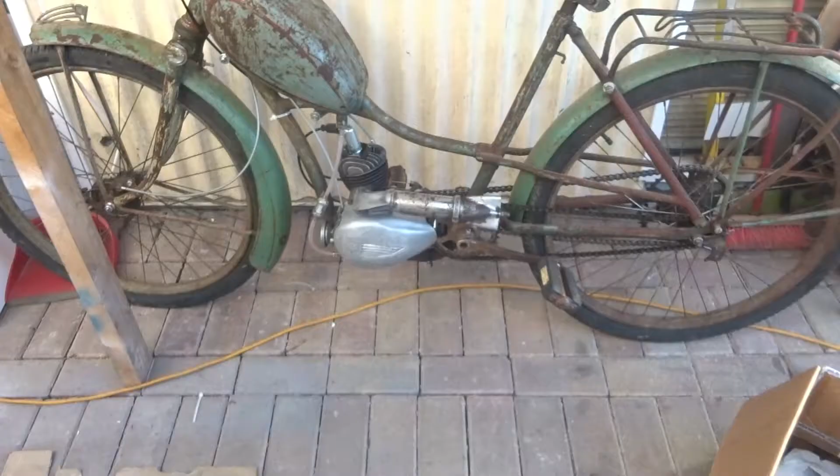In this video I'm going to be taking apart a Victoria Vicky FM38 engine, or it can also be an FM38L engine. In most of the Victoria Vicky 2s that I've seen, there's actually a petrol tank that sits on the carrier here, and the engine is attached down here.

But in this case, this came off of a bike where it was actually sitting on the back of the bike, but the engine that was on it was very rusted, and this one is replacing the engine. So what I'm going to be doing is, I have a second engine here. I don't have the aluminium cover for it, but I'm going to be taking the engine apart. So this video is taking apart, and putting back together probably on a separate video, a Victoria Vicky FM38 or 38L engine.

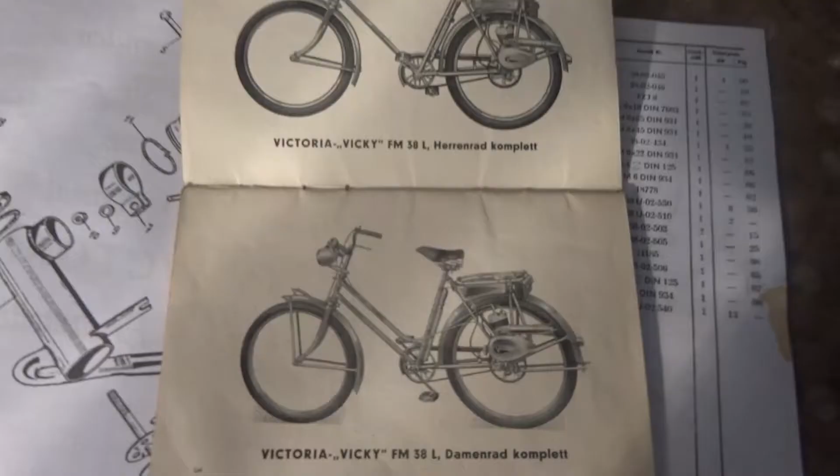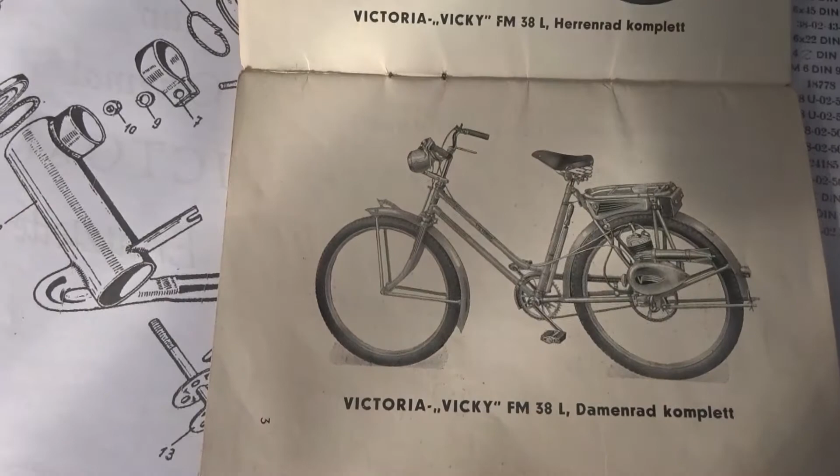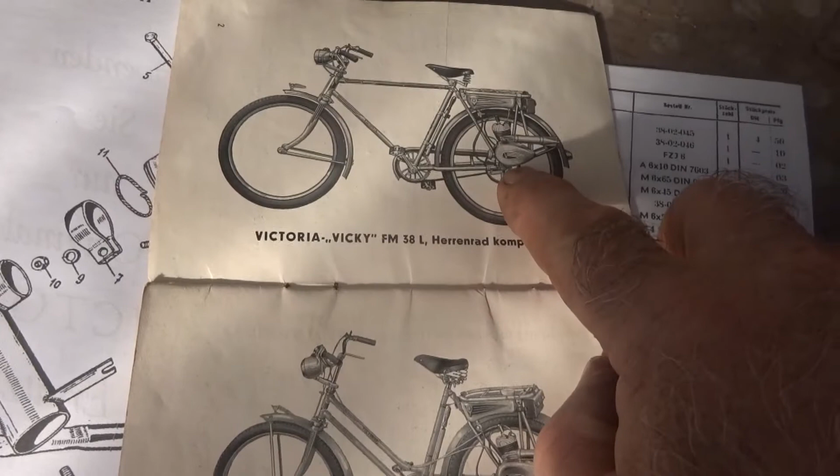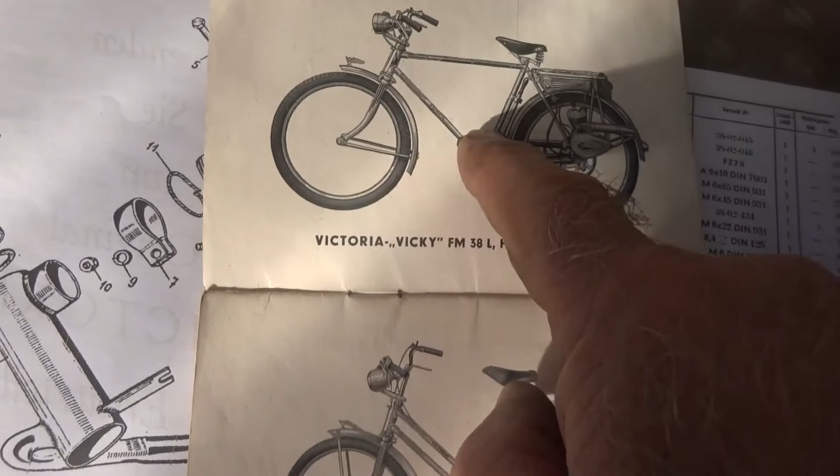These are pictures of the Victoria FM38L. This is the men's model, and this is the ladies' model. They're exactly the same, except obviously for the bar here. So as I said, the engine was normally fitted on the back of the bikes. As far as I know, these are called the Victoria Vicky 1, and then when the 2 model came out, the engine was put here. So that's the bike that I have there, the Victoria Vicky 2.

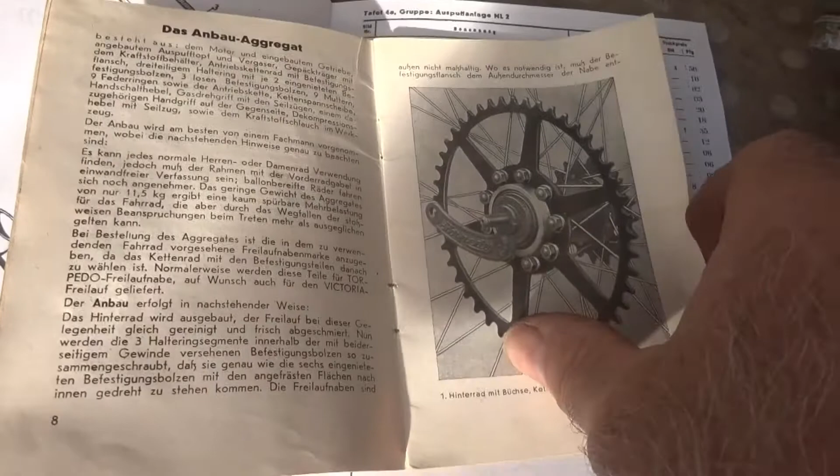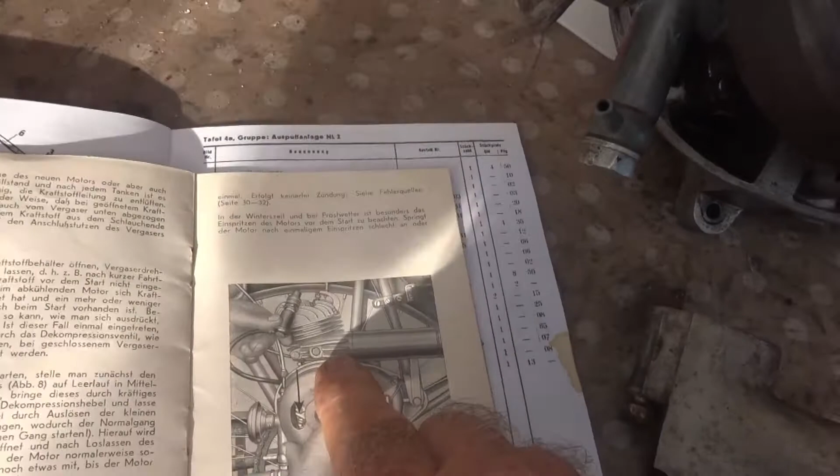So these are instructions, they're in German. I haven't been able to get one in English yet. So I'm going to go through it anyway. As you can see, this is the exhaust pipe here, and this is it here. That's the complete unit. And it's made up of a kind of a head unit, this basic pipe here, and this is the end piece here.

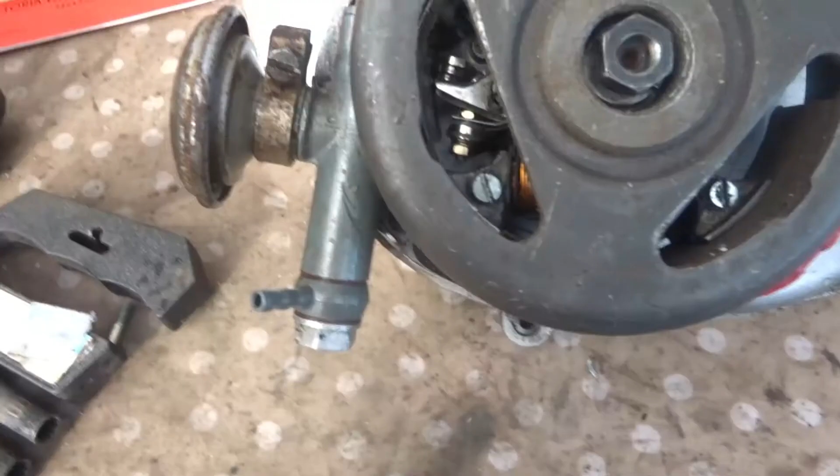There's a bar that goes through. This is the baffle. That bar goes through, and it's held in place by this bolt here. So I'll take that bolt out there now first, so that I can take this out.

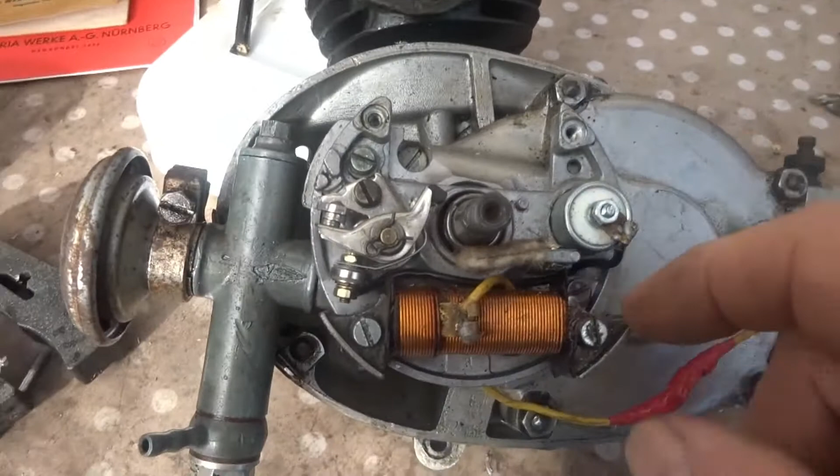I'm taking off the rotor cover there now off the dynamo, and it's a 14mm socket. To get it off, it's clockwise. The threading is clockwise to get it off, and anti-clockwise to put it on, obviously because of the rotation of the rotor, which goes that way. Right, so I'll just pull that off there now. It's not like a Quickly where you have to use pullers.

Now, I don't think that this is actually the correct rotor cover that should be on it. On another one, there was a slightly narrower one with a slope here. It was roughly the same length out to here, but it was sloped off here much more. I've actually put it on the other bike, and it spins around inside the cover better. So this may not be the correct rotor cover for this, so I'll just pull it off there anyway. There's a spring washer inside there as well. It's not coming off that easy. So that's it.

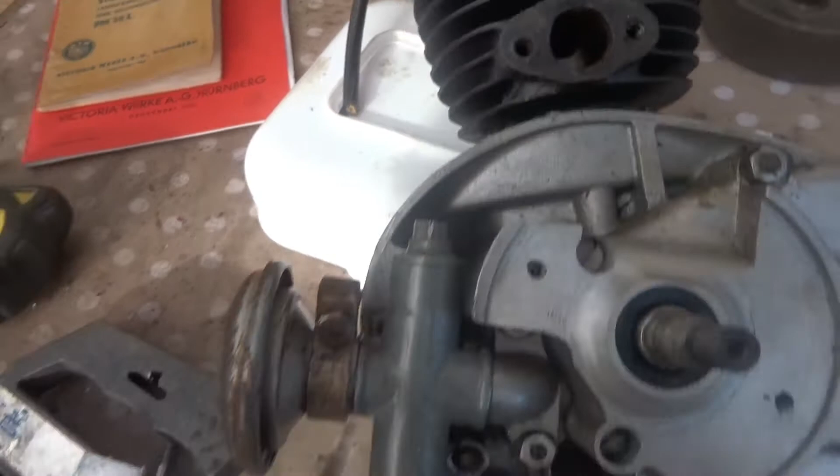Now this is the electrical unit. Somebody has obviously taken the coil off of it, the condenser, the lighting coil, and the points. So that comes off by undoing that screw there and that screw there, and this should be attached there, for this generates the electricity to the lights, if there are lights on the bike. Now on the one I have, there's actually no lights on it, headlight or taillight, but the wire for lighting the headlight and the taillight is connected here and goes through the frame.

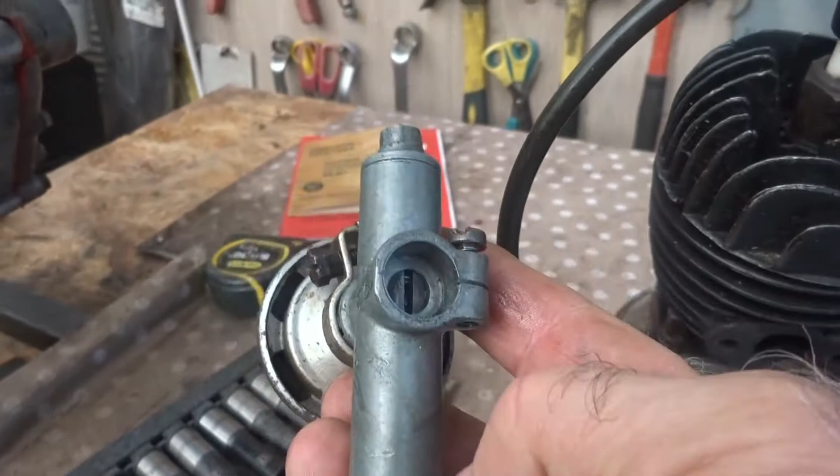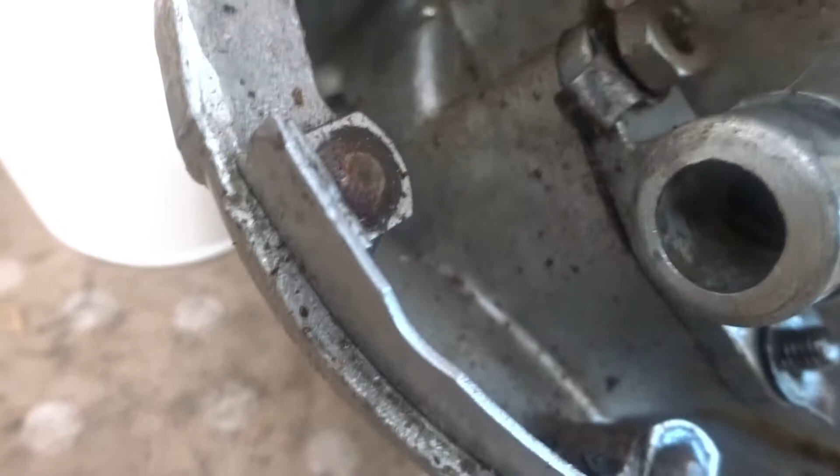So I'm going to take that off now next. That's the dynamo unit coming off there now. There are the two screws that are holding it in place. That's the other one there. Right, so the important thing with this now is that there's actually a little spring here which has to go back on, so that's not to be lost. Right, so just looking at it now, I'll take the carburetor off next, and then I'll take the head off.

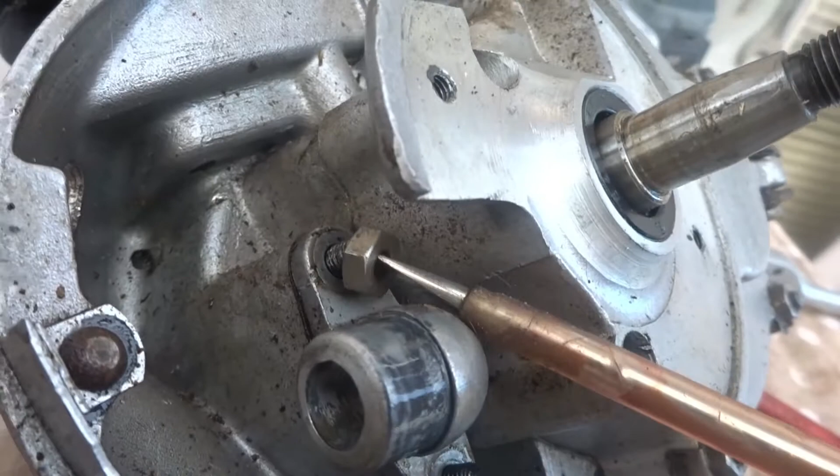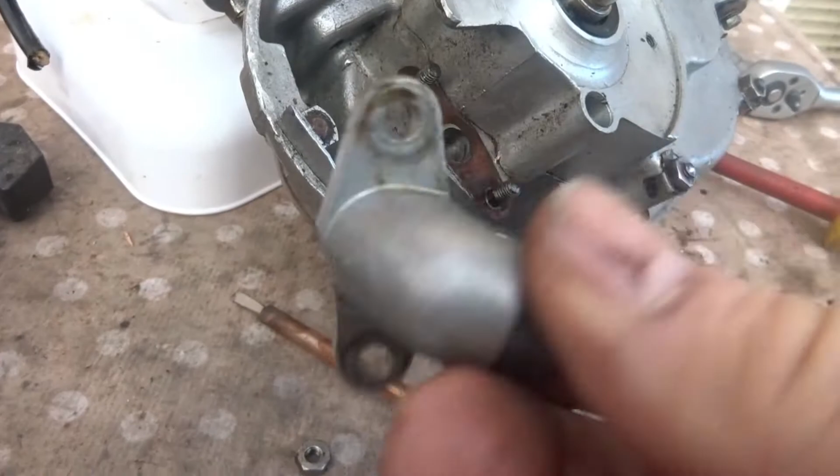So to get the carburetor off, I must undo this screw down here, which holds it onto this little unit here, which is part of the engine. And it's actually not part of the engine, it's a separate unit itself that has two little bolts on it. So I'll probably take that off next. So that's the carburetor off anyway.

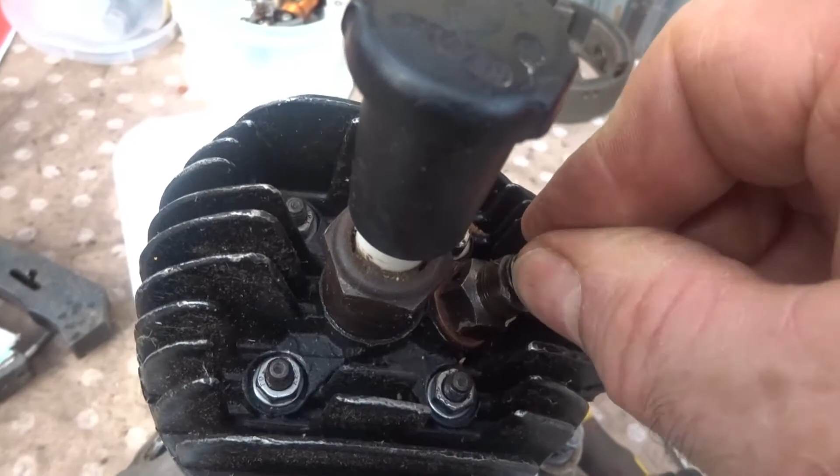And I think I saw a symbol on it somewhere, yeah, a Victoria symbol, which shows that it is actually an original one. I think it's called a Gurtner carburetor. I'll take that apart later on.

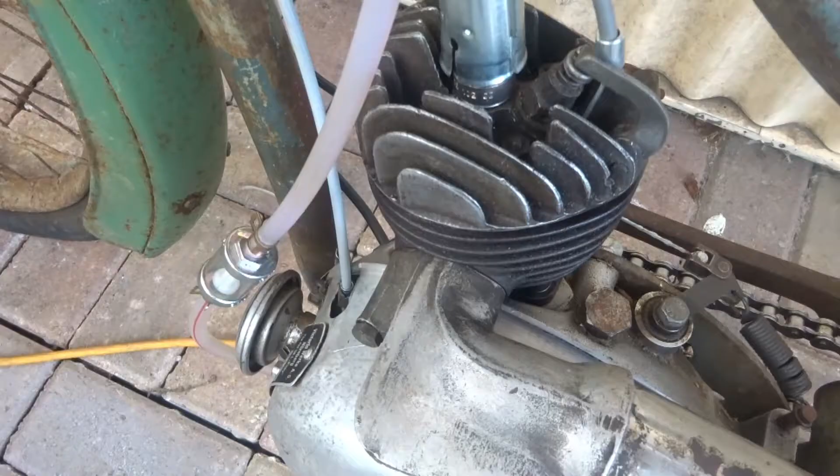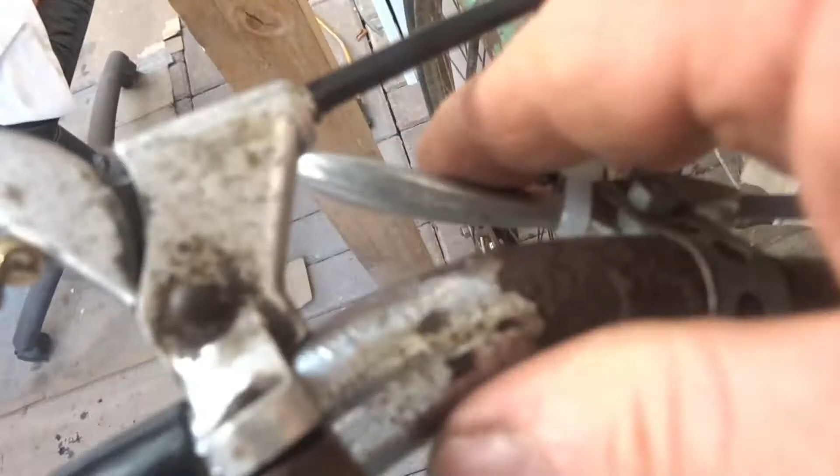Now these are actually 9mm nuts, so you'll need a 9mm spanner to get them off. And there are special little lock, kind of a lock washer on them. This one, the lug is broken off of it. So there's a little gasket on it there as well. So that's it. I'll take the head off next.

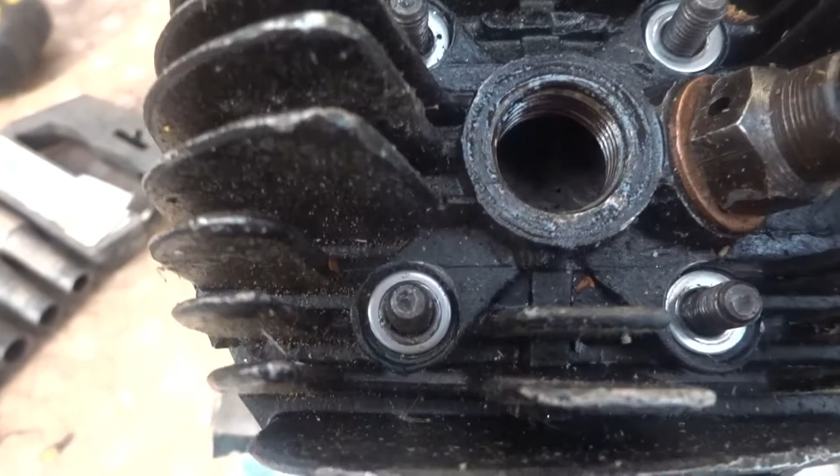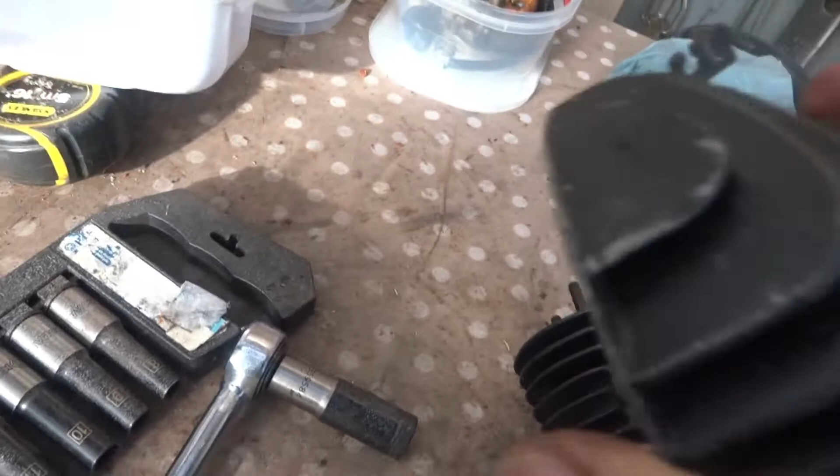So there are four. They turn out to be actually 8mm, so I've put on an 8mm to get them off. This is actually the decompressor to stop the bike. You can see you can press it down, there's a spring on it, and it pushes down a little valve kind of a unit, and it turns the engine off. That's the only way to turn it off, other than turning the petrol off. Right, so I'll continue to take the four of them off and see what it's like.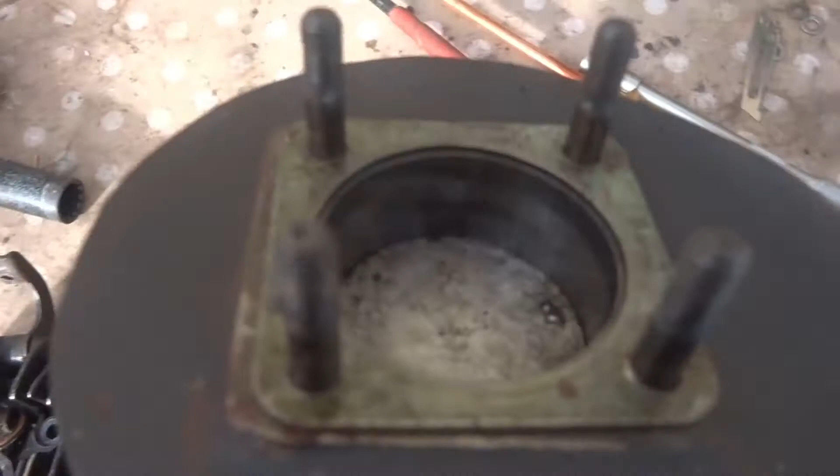This is the lever for pressing the bike off. So you have a decompressor cable going up to the handlebars. On the bike that I've completed there, you can see the decompressor cable. It's coming down, it's attached down below inside there. The little nipple on the end of it is hooked in there, and it comes up here onto a decompressor cable. So when you pull this lever here, it pushes down on that, and it stops the engine.

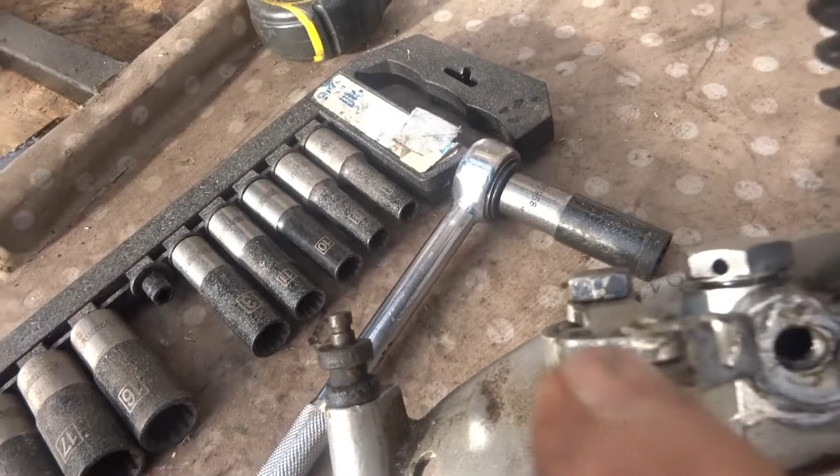Now that's the four bolts off, and it looks like there are four washers. They're not spring washers, just ordinary washers down there. So I'll turn the engine upside down now to get them to fall out. I'm just taking out this gasket here off the carburetor just to try and salvage it. It appears to be in reasonably good condition, but I have sets of them ordered anyway. So I'm putting all the various pieces into separate boxes.

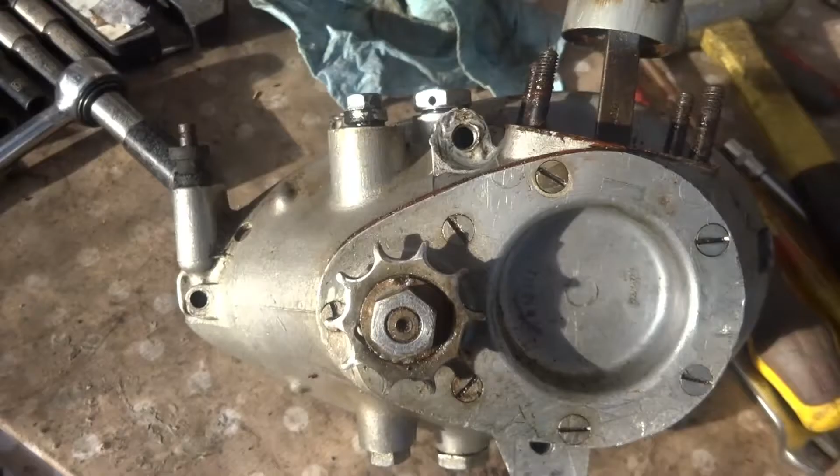So this is the head after coming off, and you'd see when I press this here, this little lever goes in and out there to turn the engine off, to let out the pressure. Right, the next thing to do is to take off the top head, and to do that there are four special kind of bolts there that must be undone, and you have to pull the head up as it goes. Now luckily enough the piston goes up and down. I must take off this gasket here. Actually I'll leave the gasket there, I won't take it off.

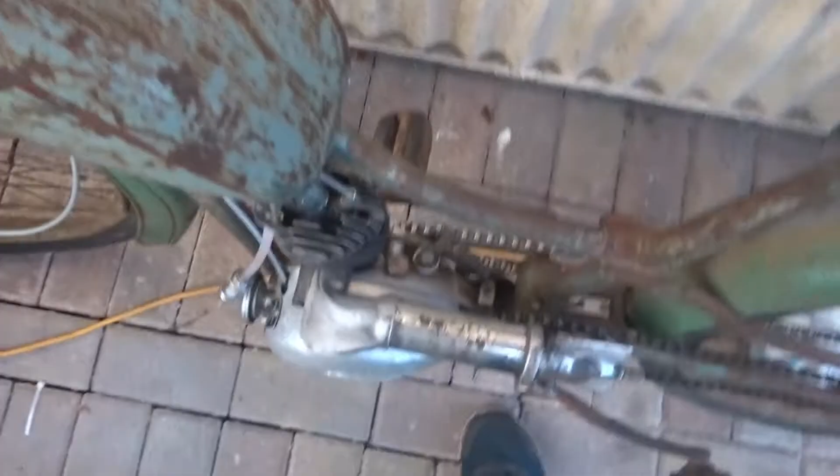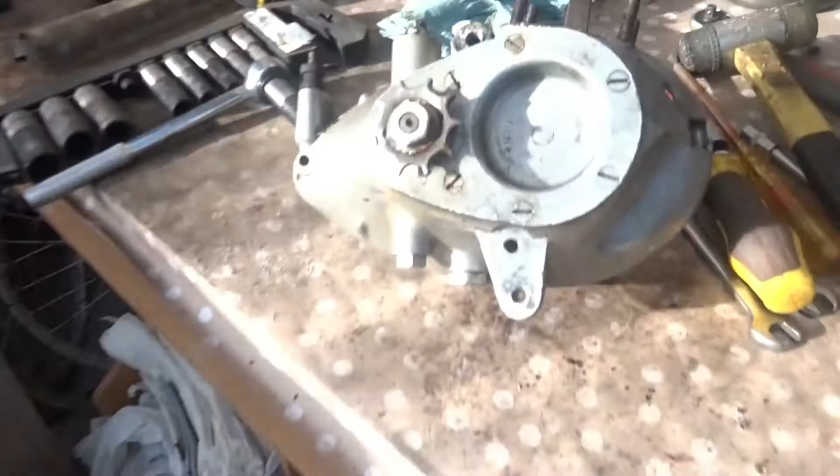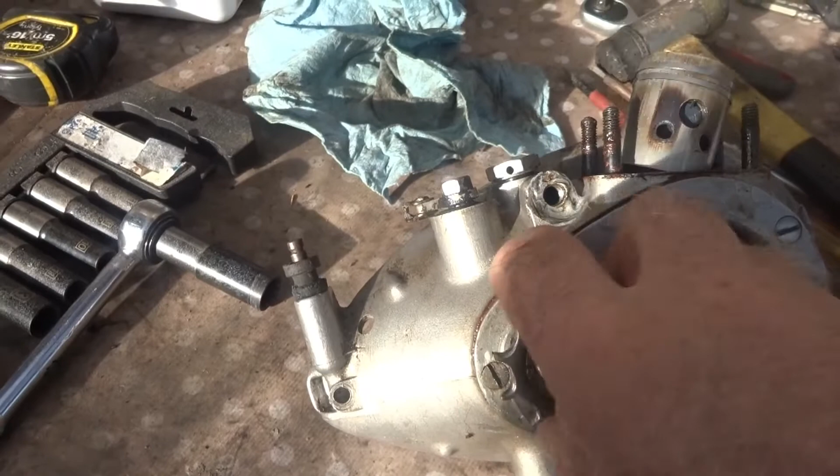Now I'm working away here undoing these nuts. They're actually 10mm, so you need a 10mm spanner for them. So I'll just keep working on the 4 of them. There, the other 2 there. I've just noticed on the upper head that there's a kind of a unit goes on there. I'll show it you on the other bike there now. That actually works the gears. As far as I know, this is the gears. I'm not an expert on these things, but it's a shame that that little piece is broken off there, because the barrel itself is absolutely perfect inside it.

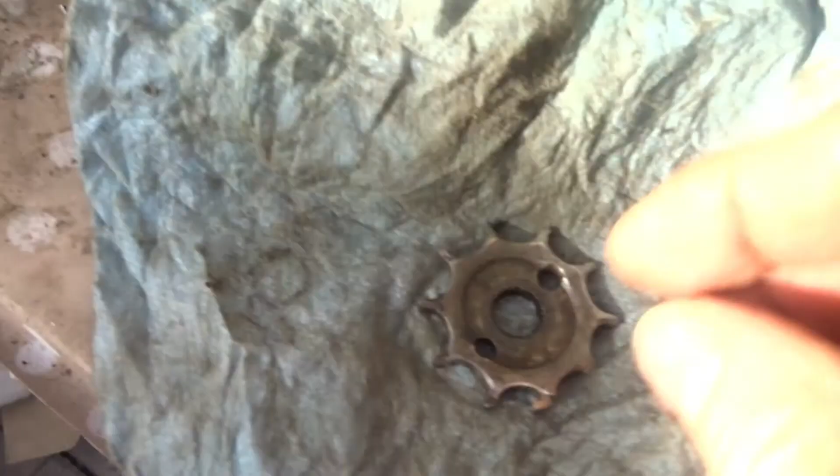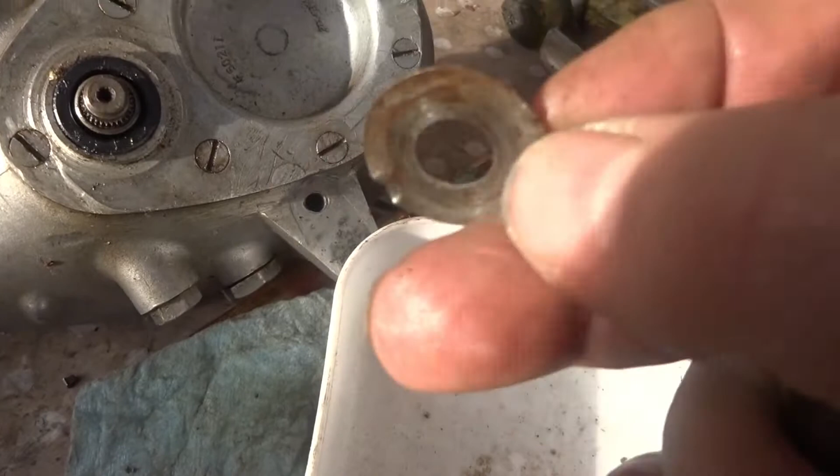I'm now taking off the sprocket so that I can get in here. One of my main reasons for taking this engine apart is to find out how the gear operates in here, because on this one I can't actually get it to go into, no, I don't have the correct 3-stage gear lever, so I'm waiting on something like that to arrive, and it pulls the gear shifting down there, that unit there with the spring on it, and it's supposed to give you a first gear, neutral, and second gear. So I'm hoping that I'll be able to see all that inside there.

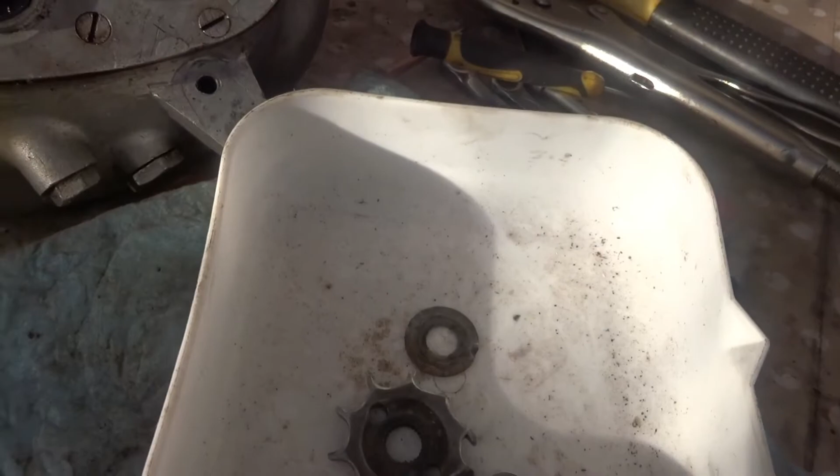Now I have to take the piston off. I wasn't going to, but to be able to stop the sprocket from moving around.

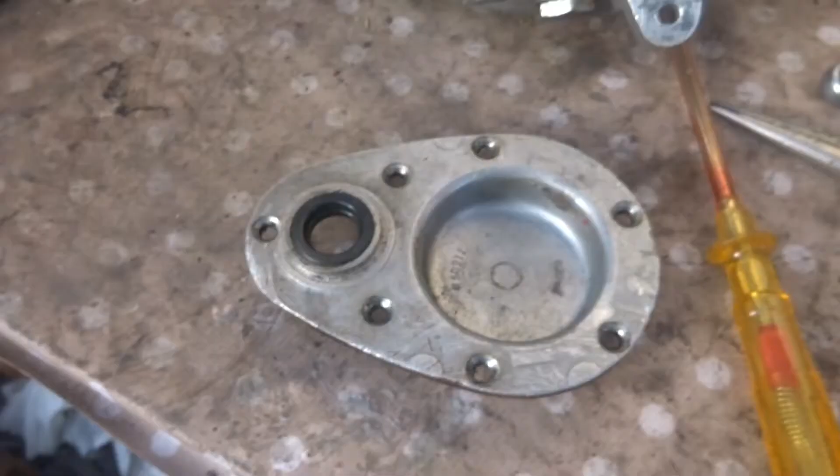Like so. I'll be able to put a screwdriver through the top of the conrod so that I can undo this nut here, which is probably 19. No, it's only a 17mm.

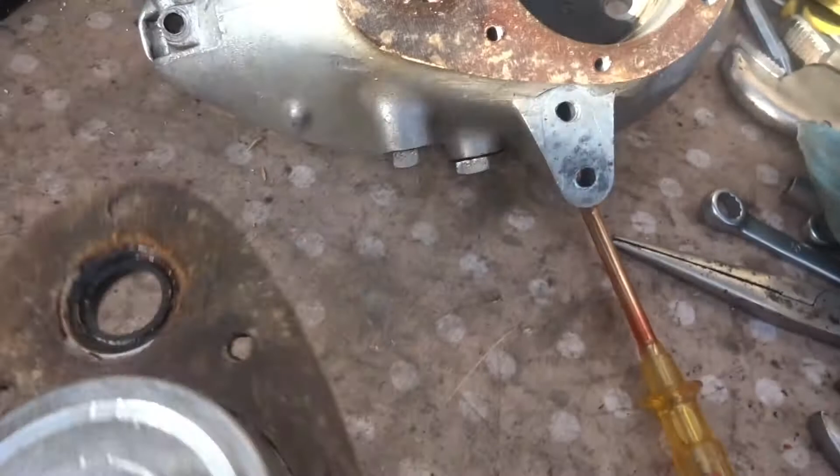Now the sprocket is pretty badly bent, and I've damaged it trying to hold it because the engine seems to be in neutral, and even though I held down the piston it was still turning. But anyway, I'll have to get a new one, and you can see that it sits on a kind of a spline. It goes down into that spline there like that.

When I took it off as well, that's the nut, and there was a washer underneath it. Now it looks maybe as if there was pieces on the end of it here. I don't have the spare parts list, but I'll see if I can source one of those sprockets. Right, the next thing to do now is to take this cover off here and see what's going on inside there.

That's the cover off there now, and there's actually a 15x24x7 oil seal on it. Now I'm not sure if the gasket has come apart in 2 pieces or if there's 2 gaskets. It looks like there's a gasket on there, and it looks as if there's a gasket on here, but I'd imagine there should only be 1 gasket there, but look, I'm not sure.

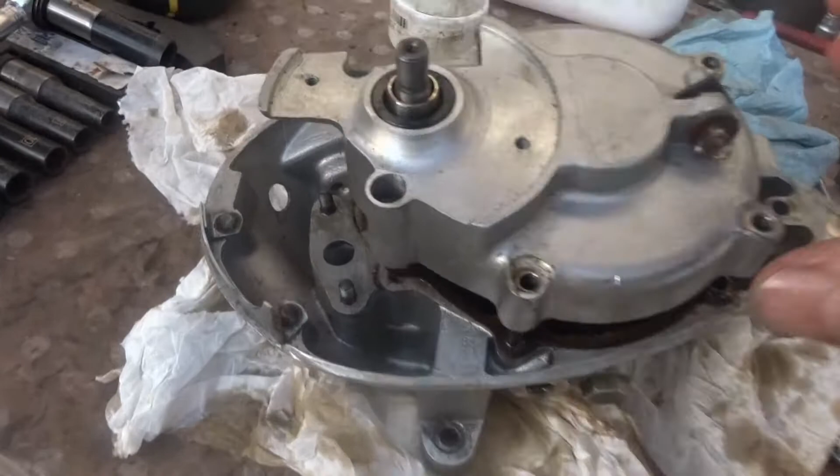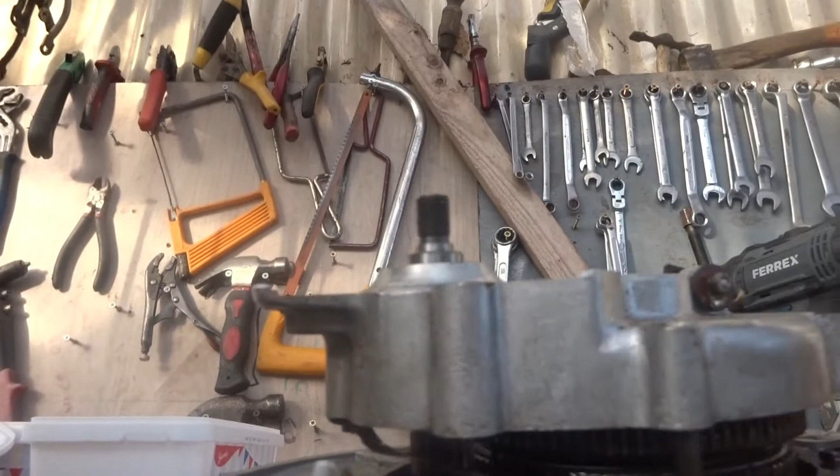So anyway, it shows the conrod mechanism here, which is very unusual. And I still can't see the gear mechanism, which is here. It appears to be in neutral, as I said, at the moment. So I'll have to take the casings apart just to see what's going on. Right, to get this conrod out, it looks as if I've got to take off a circlip here.

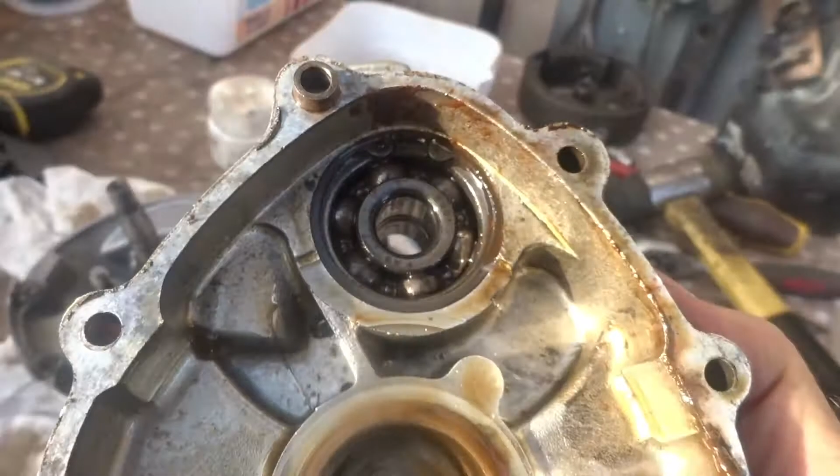Now I've turned the engine around and I'm going to take off this casing here. There's 4 bolts and it looks like 2 screws holding it. Right, I'm taking the oil out of it now, because it's spilt all over the table there, so I'm just undoing this nut underneath, which is a 17mm bolt. Sorry, it's a 19mm. So I'm going to turn it upside down and put it into this here.

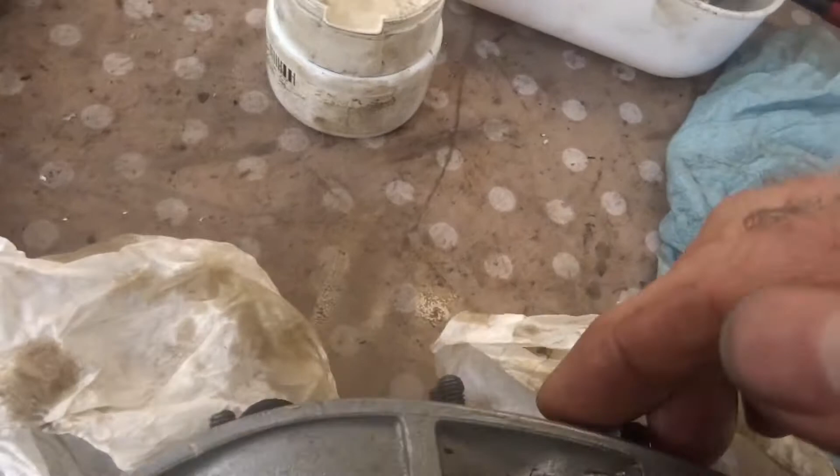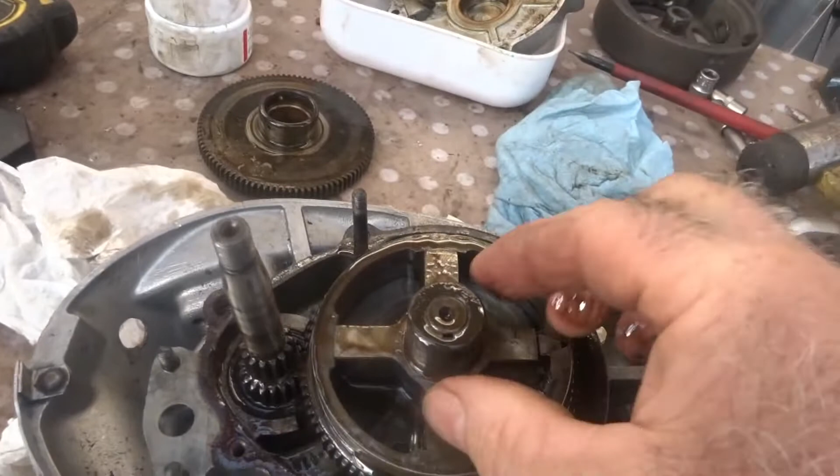Now the nuts came off, 3 of them, but this one here, the whole bolt has threaded out. So I'll just put it into the box, and I must take out these 2 screws. I think it'll come apart then at that stage. Right, it's starting to come apart there now, and I want to be careful because sometimes when you do these things, little pieces fall out and you don't know where they've fallen from.

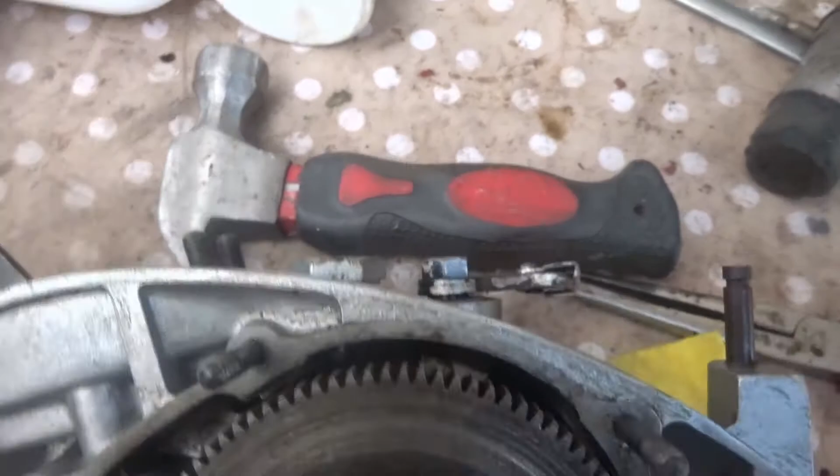That's the gasket. Okay. Right, up it comes. So there's a bearing in there. I'll have to check that out and probably change it. And here we have the gear system. So I'll have to take out these wheels and see what's going on. The one just comes completely out, like so.

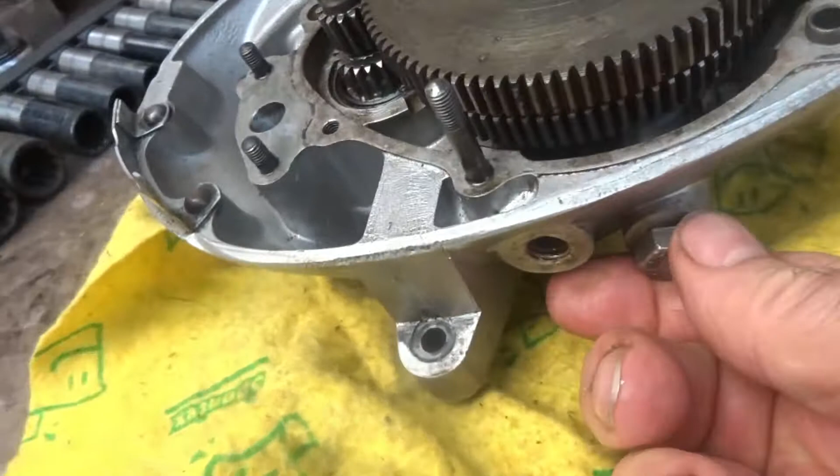I'll fiddle around with that now before I film it, just in case I start to lose bits and pieces. Right, this seems to be a locking collar here that actually comes off, like so. And I'll keep it the way that it comes off now, so that's up. There's a little pin here. Oops, there's a ball bearing fallen out of there now. So I'll just put it into my tray and pick up that ball bearing first now before I carry on.

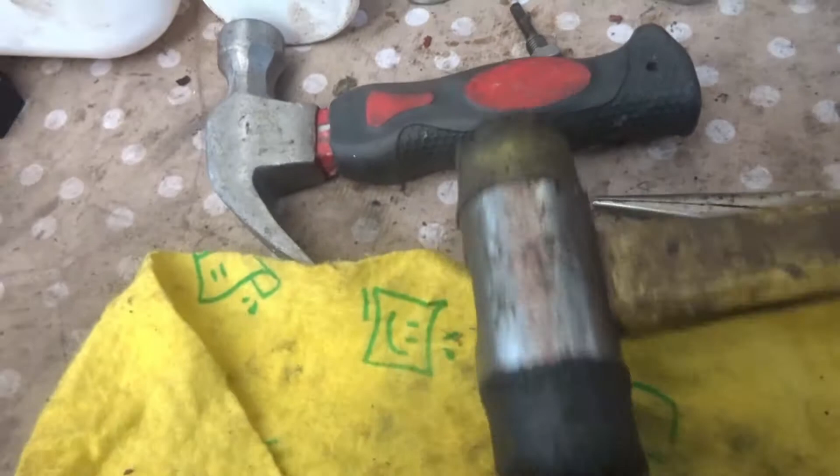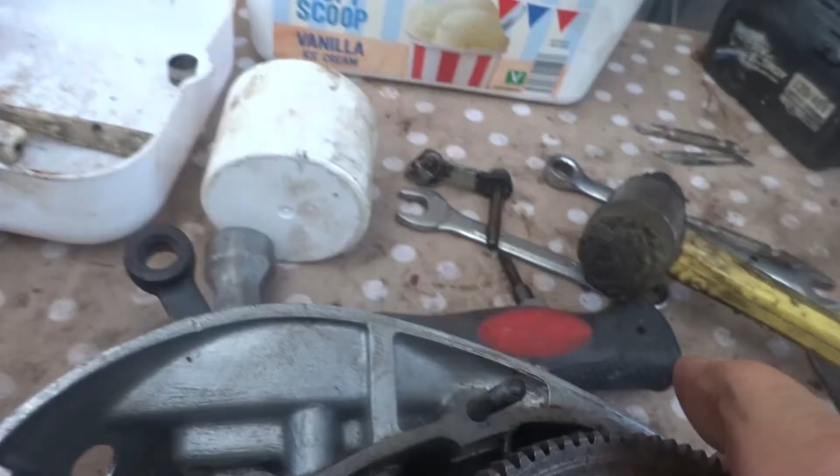Right, now the engine still has the conrod in it. Now, I've done it all already, so I know what I'm doing at this stage. So what you have to do to take this out, you have to take off the little gear actuation thing on top here, which has, I think, about a 10.5mm, because the 10 won't open it, and that's an 11mm spanner. And you'll see on that there that it's actually grooved. That's what changes the gears.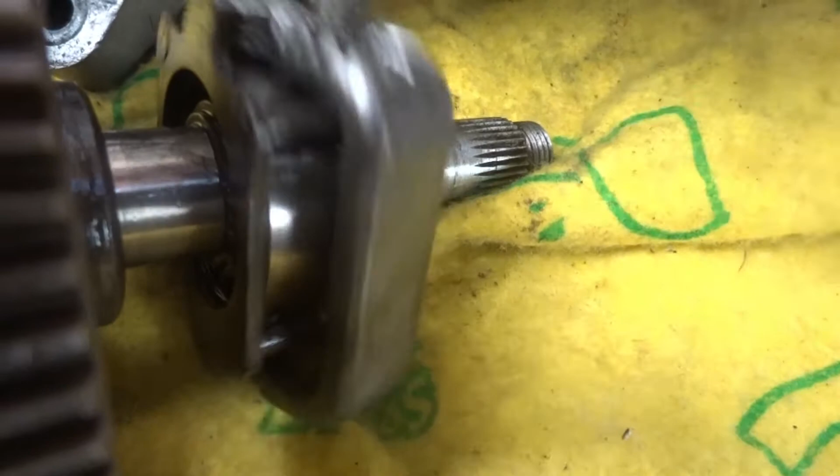Right, it's a little spindle that goes down in there, so take that off. On the bottom there's a screw. You have to take that screw off as well with a 14mm spanner.

Now I'm loosening it there and taking it out. All it is, this is what the gear change unit inside, which you'll see in a minute, pivots on. So this is at the bottom and that's at the top. So now I can take this out.

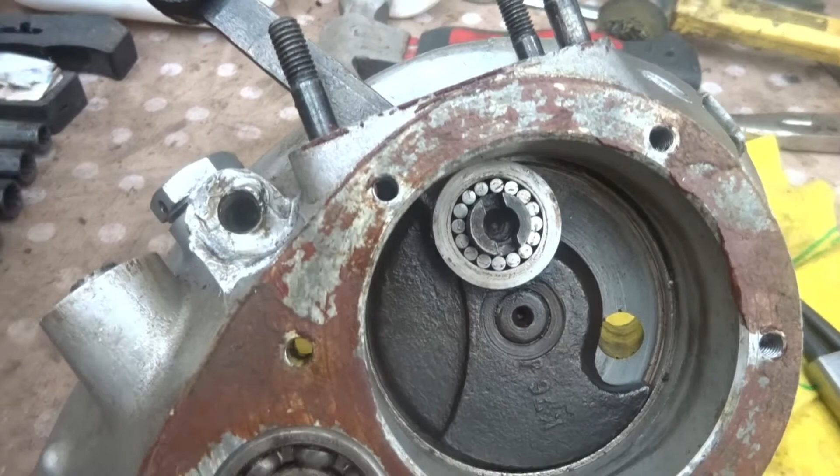And to get it out, you have to hit it here with a rubber mallet, not with a hammer, because you'll damage the threads here. So a rubber mallet. I'll give it a tap now and it'll come out. So out it comes.

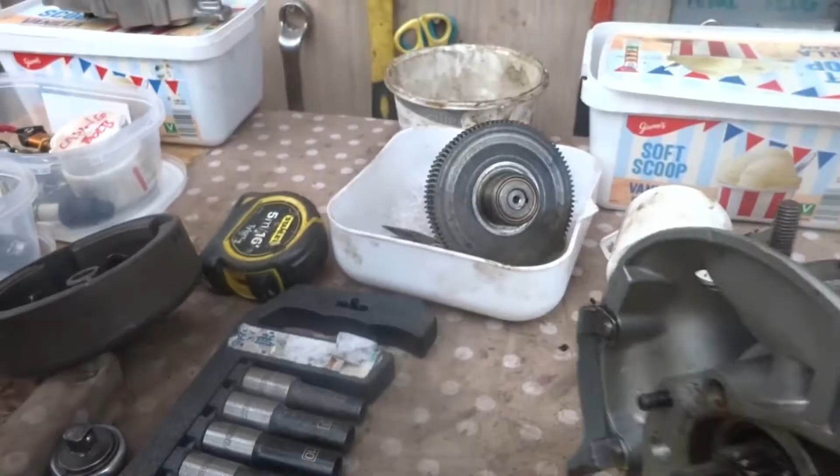Now what happened is, this is the gear actuation unit. This is the screw that goes in at the top, because it's serrated, the same as that is. And this goes in the bottom, in through the casing, and it just goes in there like so and holds it in position. So it just pivots around that. Putting it back together, you have to do the same thing. You put this on.

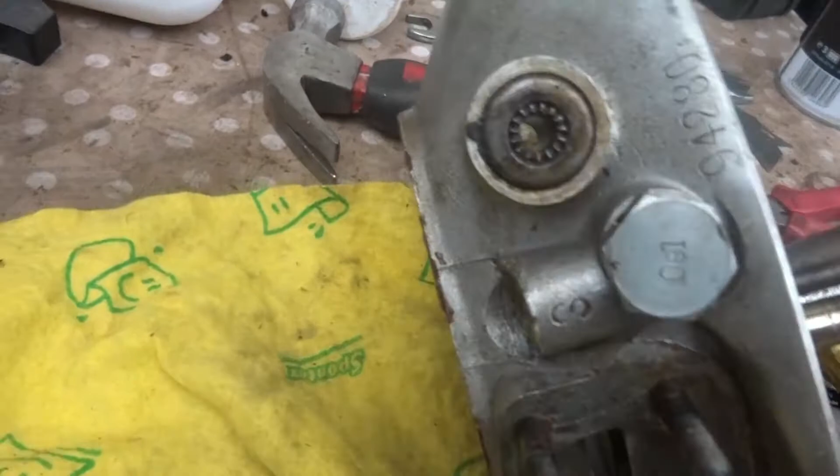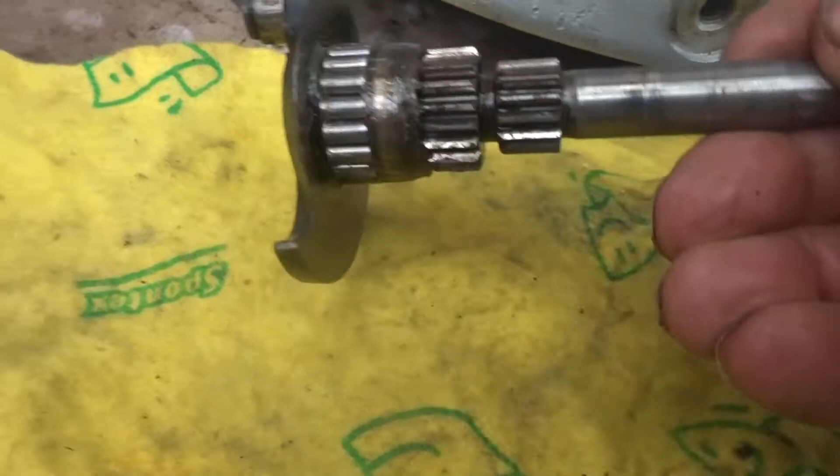This piece actually can come off. I'll just get it off there now with a screwdriver. I'll try it by hand. Now it comes off. So I'm taking out the circlip. And then this washer. And there are all the needle bearings behind it. Needle bearings is the word I was looking for.

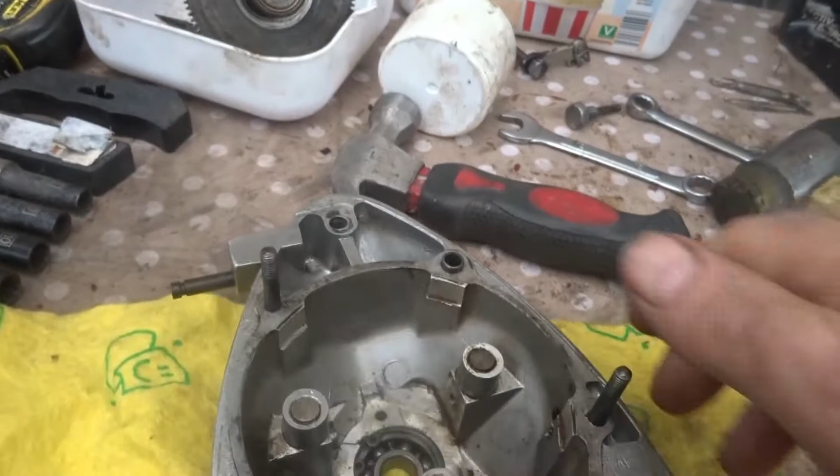So I must knock all these out now, and then I can take out the conrod and it can be pushed through from the other side then. Right, I've knocked out the needle bearings, and there are 3, 5, 9, 12, 16 of them. That's the special washer. And now the conrod itself can come out. So that's all open now, there's nothing to stop it from coming through. So I'm going to put all those into a box there now so that I don't lose them.

As I said, I must now hit this with the rubber mallet and push it through, and the whole unit will come out. And I know that there are more. I didn't need to hit it with a hammer to start it coming out. So I'll just take this up off of it.

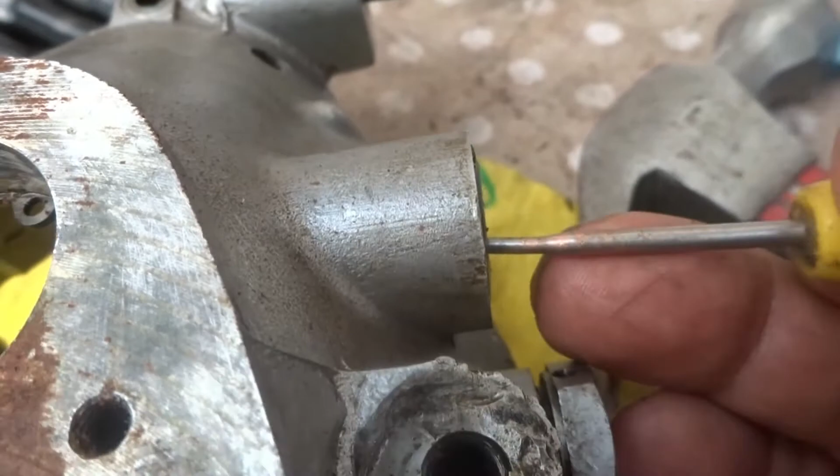And they didn't fall apart this time because I put grease on them to hold them in place. These are all the needle bearings. These would have fallen out, which they did the last time, but when I put them back on, I put grease on them to hold them together. So that's the conrod, or the crankshaft, whatever you like to call it, out. Put it in there with the other part of it.

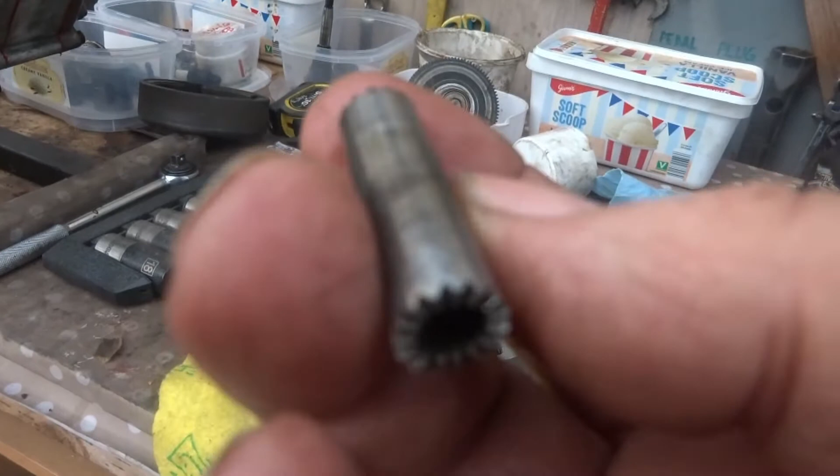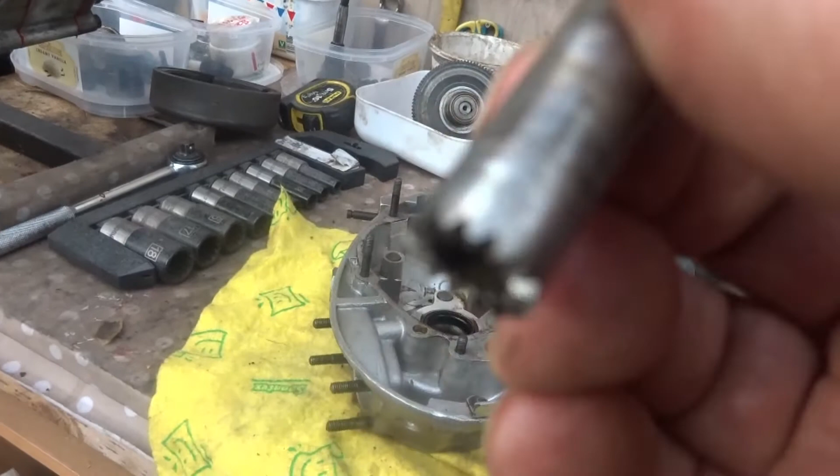So that's it. I must change this bearing. I must get a new bearing for there, and I must give it another bit of a clean up. So that's it for taking it apart. I think that was all the main parts of the engine. The only thing that's missing, as I said, is the cover. I don't have a cover. I didn't get a cover with the engine, so I must try and locate one of them.

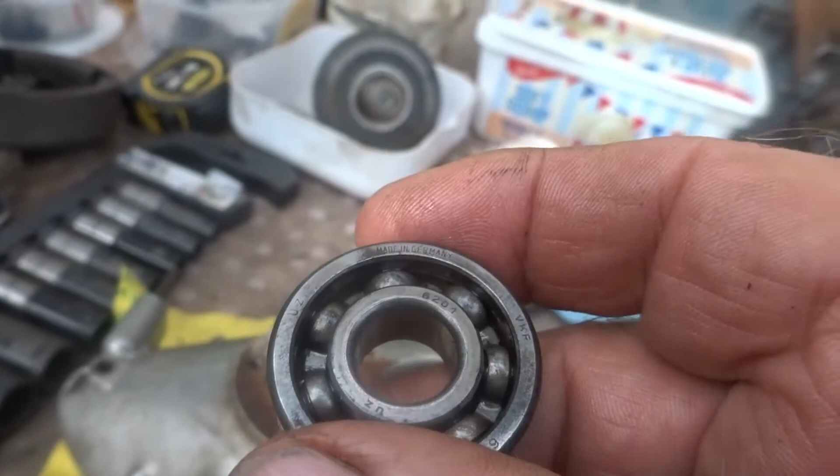Again, going back to the gear change, this is the screw on top. This is what's changing the gears, and for some reason on this engine you can just keep pulling this thing and it just doesn't do anything. So it's possible that the cogs down here are broken, so I've ordered one to fix it. I didn't want to open that engine, but I'll have to. So anyway, I'm just going to finish off cleaning this engine, and then once the gaskets arrive, I'm going to put it back together.

I'm just going to push out that serrated pin that actually changes the gears there, just to see what it's like. And it appears as if it only pushes inwards. So there it is. So that's the pin. I've ordered a couple of them from Sweden, as it turns out.

Now it looks as if the top is quite badly worn, and the inner section that was inside looks to be in good shape. So it's probable that these need to be changed every so often. So that's the end of taking it apart.

I took the bearing out of it there, which is a 6201. 6201. Yes, 6201. Right, and I'm just cleaning up the casing now as well before the gaskets arrive.